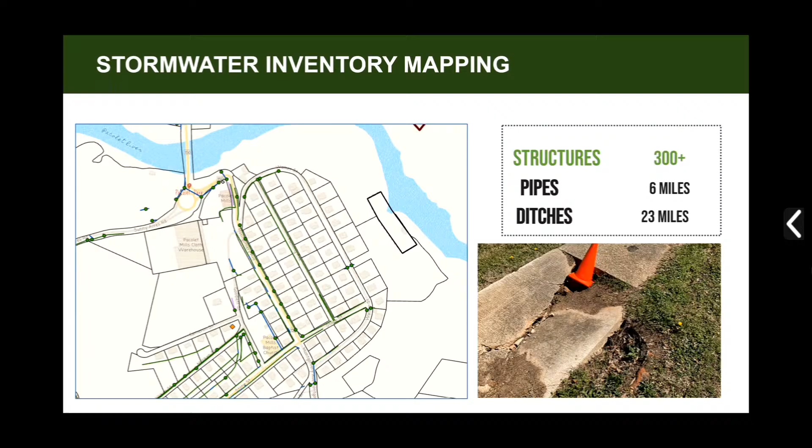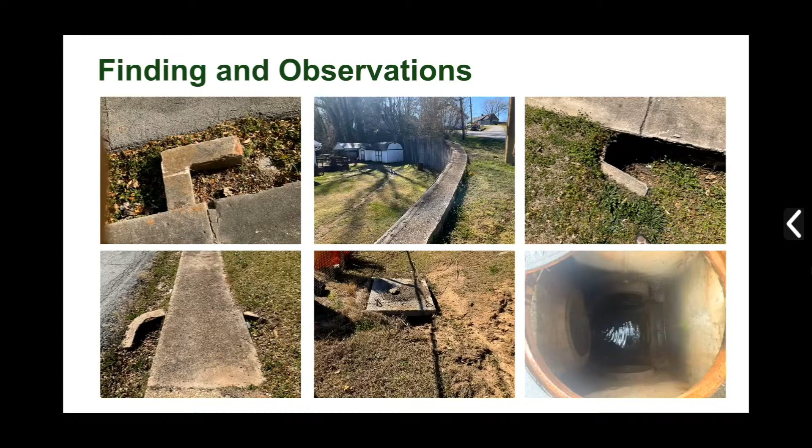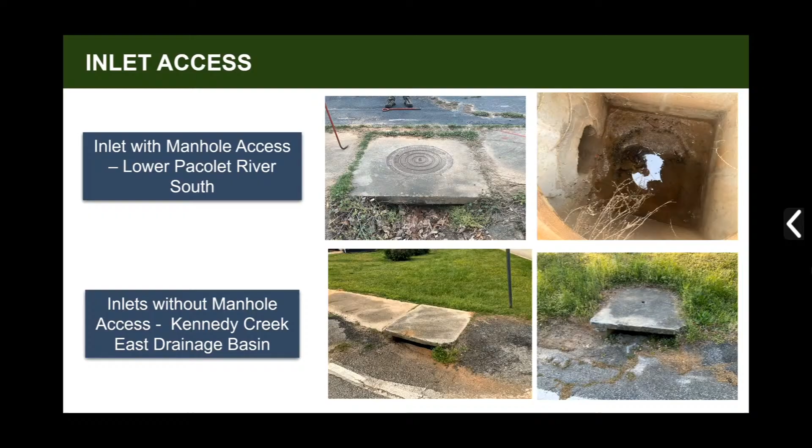Being able to access these structures to check their condition is extremely important, and as important, it allows you to clean them out, because it's very common in stormwater systems anywhere you go that sediment gets in there, debris, and it interferes with the flow. And sometimes areas that are having flooding, that's all it is. The pipes are fine. And plus the condition of pipes: sometimes you have collapsed pipes, so just keep that in mind for any future installations the city implements.

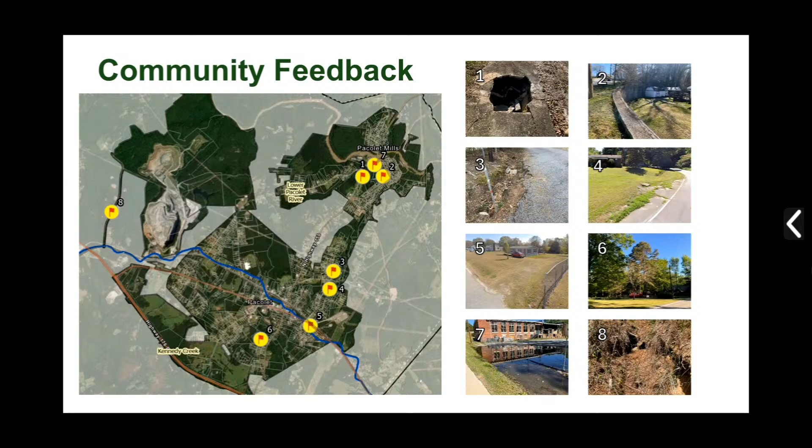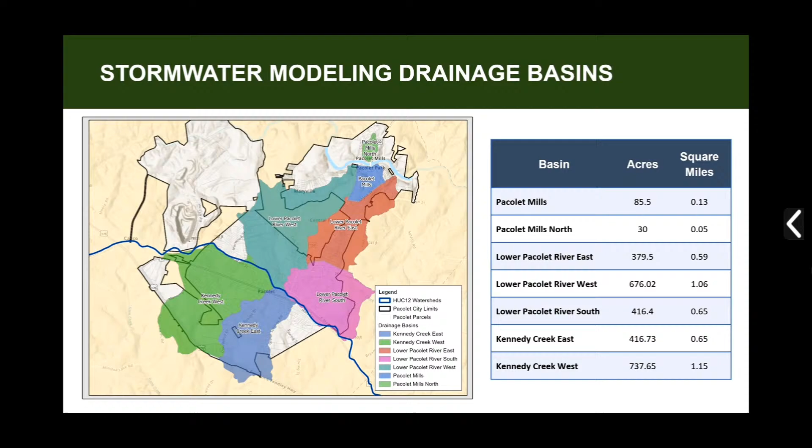The 5 watersheds that are on the north side, that blue line is somewhere right around Main Street. Those 5 watersheds all drain to the Pacolet River. The 2 to the south drain to the south. So just to keep everything oriented, that's how the drainage patterns work in the area.

Okay, so getting into the actual H&H modeling, what we use for watershed scale models is a model called StormWise. It used to be called ICPR. StormWise uses a system of nodes and links. Nodes are point features typically placed where you have an inlet or a junction box, and the model calculates water surface elevations at each of those points.

The nodes are connected by links, and there are 2 forms of links. Some links represent pipe links, so the nodes, which are inlets or structures, are connected by pipes, or they can be connected by channel links, which are open channels or ditches.

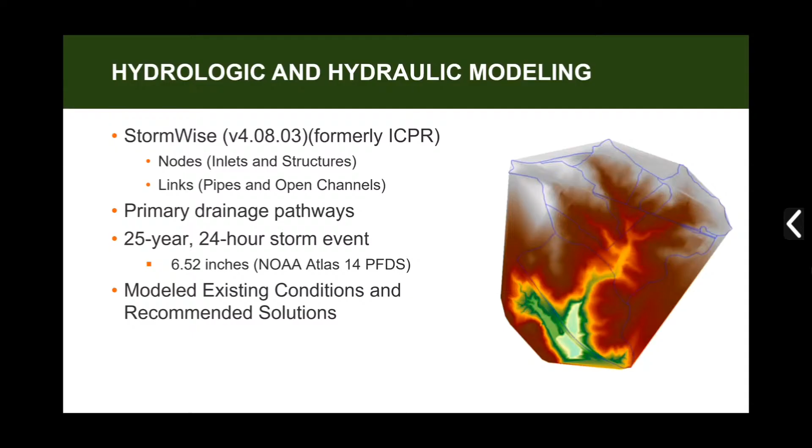We mainly modeled the primary drainage pathways throughout these watersheds, and we modeled them based on calculated flows for the 25-year, 24-hour storm event, which according to NOAA Atlas 14 here in Pacolet is 6.52 inches for a 24-hour, 25-year storm event. And for each of the basins, we modeled existing conditions, and then we incorporated our recommended improvements and modeled those also.

An example would be at a culvert on the upstream side. We would place it about at the road surface elevation, and so if the model water surface elevation exceeded that, then we would know that that's a problem because it would overtop the road. And then also for each basin, based on the model water surface elevations, we created a kind of a preliminary list of recommended improvements that would solve most of those problems.

So this slide, I think the next one goes into the Pacolet Mills, because that was kind of a very complicated thing to model. We went to the park on the west side of Pacolet Mills and took measurements for that open channel. And what we learned inventorying throughout the Pacolet Mills area is that those trapezoidal channels are pretty consistent in the same size. You can't see it, but that sketch on the right kind of details the approximate sizes.

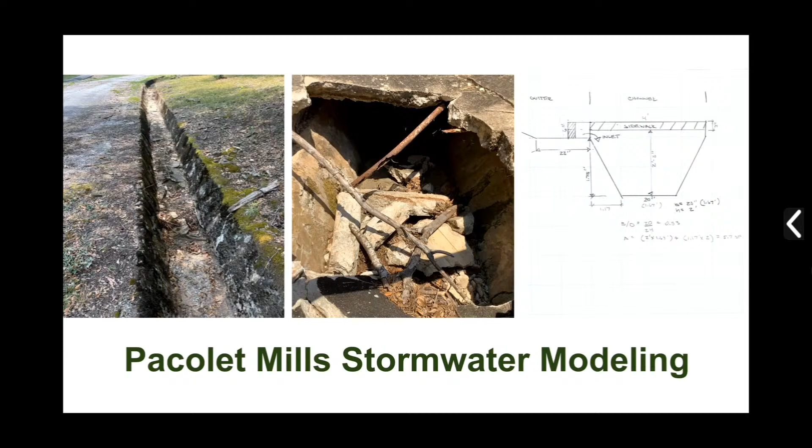The picture in the middle is also in the park, and it's hard to see, but the sidewalk covers the trapezoidal channel, which is most of the cases throughout Pacolet Mills; you can see the trapezoidal channel underneath the sidewalk. So these are a couple more pictures of Pacolet Mills. I believe this is across the river, and this we just wanted to show kind of another typical case in a situation where the trapezoidal channel is underneath the sidewalk.

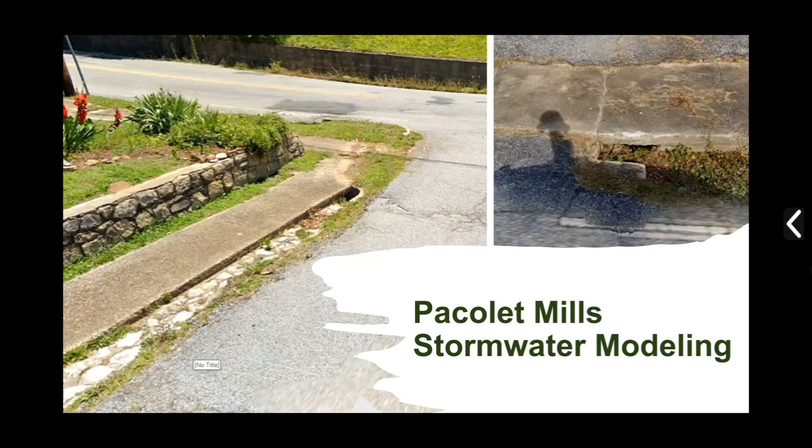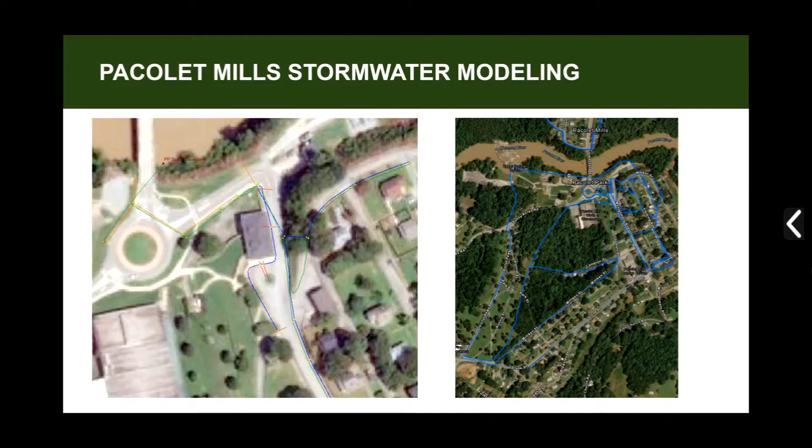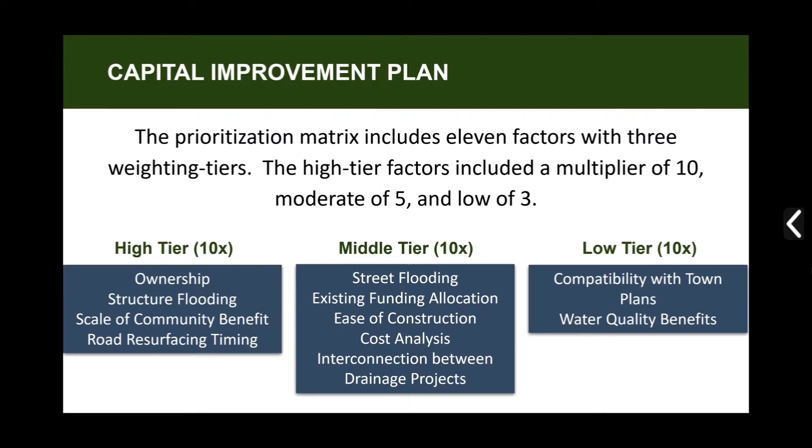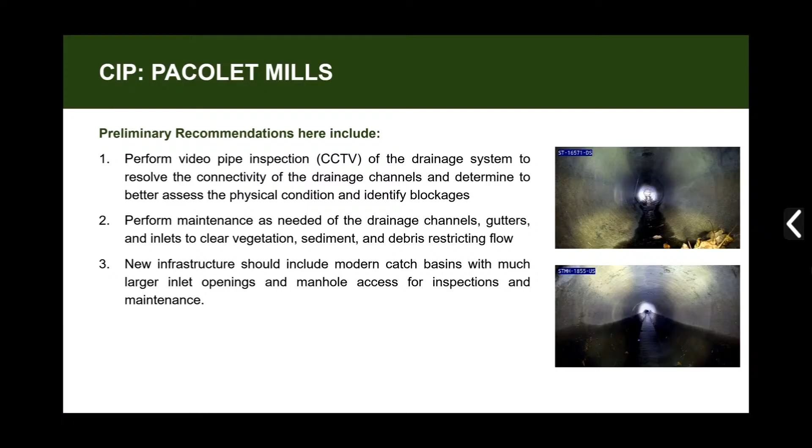So this slide, we work with a company called Augusta Industrial, and they gave us some prices. They do a lot of this work for us. So we just gave y'all some prices so you could see what you might be incurring. To do the CCTV, which they just put a camera on wheels and run it down the pipes or the channels, the price was $2.25 per linear foot for over 1,000 feet, and if it's less than 1,000 feet, a much higher rate of $8.45.

And then cleaning out the structures or any debris they found, they gave us a per hour fee of $285 per hour, which is just kind of the light cleaning, 3 passes.

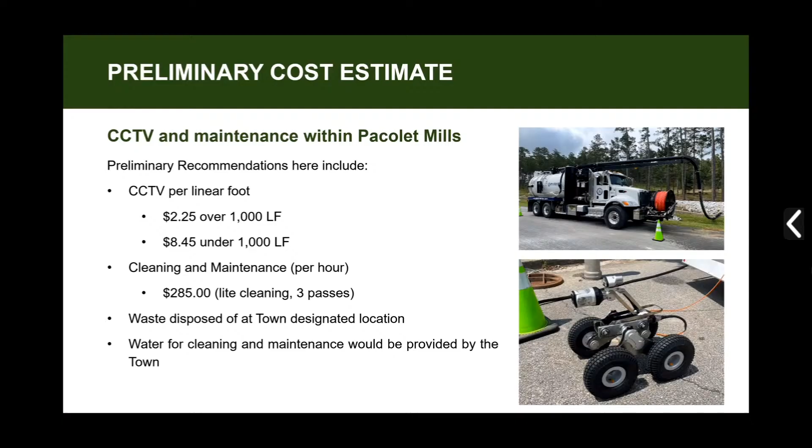They also mentioned the waste disposal would be done at a location designated by the town, and then they would need water for the maintenance, and that would be provided by the town.

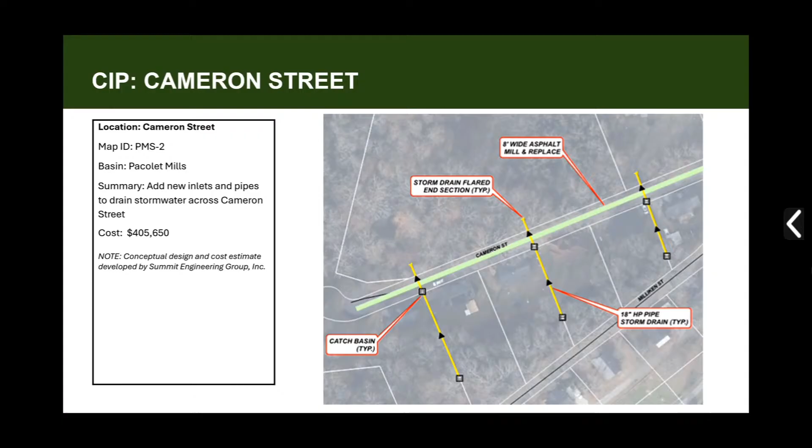This was a situation where the sidewalk has collapsed, is below grade, and it's completely filled with sediment. And when Summit looked at it, it was basically abandoning the existing trapezoid system and then putting in something brand new in this particular area. This area, if you've talked to some of the residents, their backyards get flooded regularly. Their crawl spaces or basements get flooded regularly. And this was an opportunity to try to fix some of the issues that are down there. And I think there's a swale behind those homes that runs to the west.

This is also Woodland Circle, but it's a little bit to the south in the southeast corner. And here there's a culvert underneath Woodland Circle. And as you can see on the downstream end, it's completely collapsed because of severe erosion happening around it. So obviously the culvert needs to be replaced. One of the problems is that culvert crosses the road 90 degrees from the drainage ditch that's feeding it, which is a problem because the water doesn't get into the culvert efficiently.

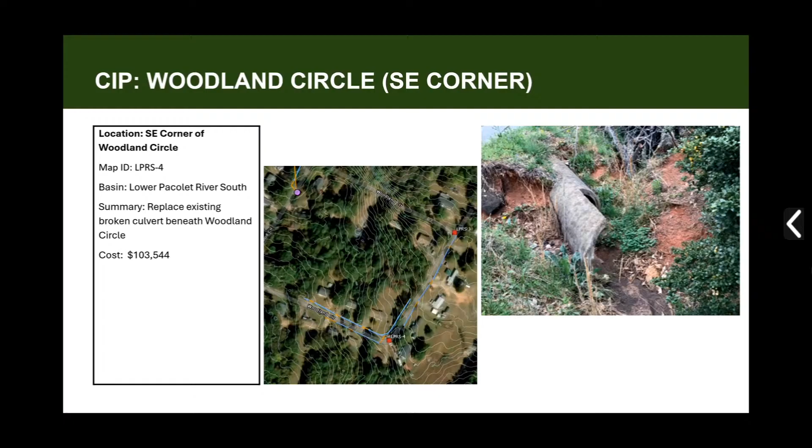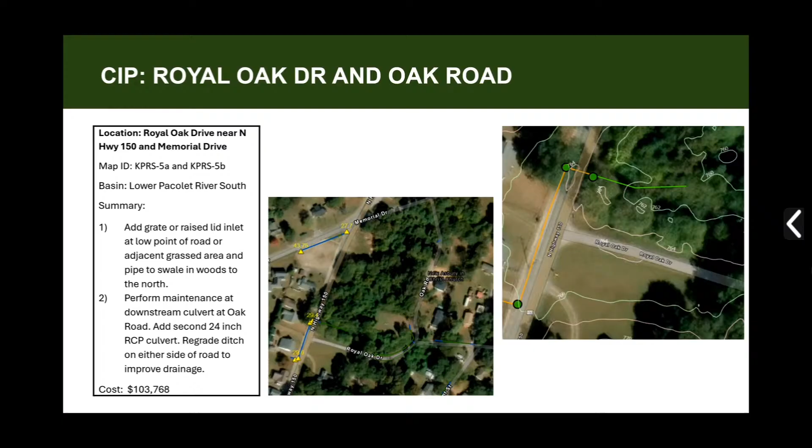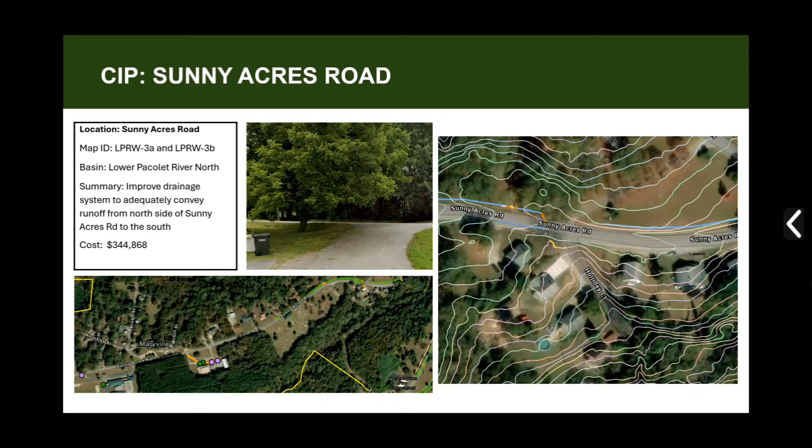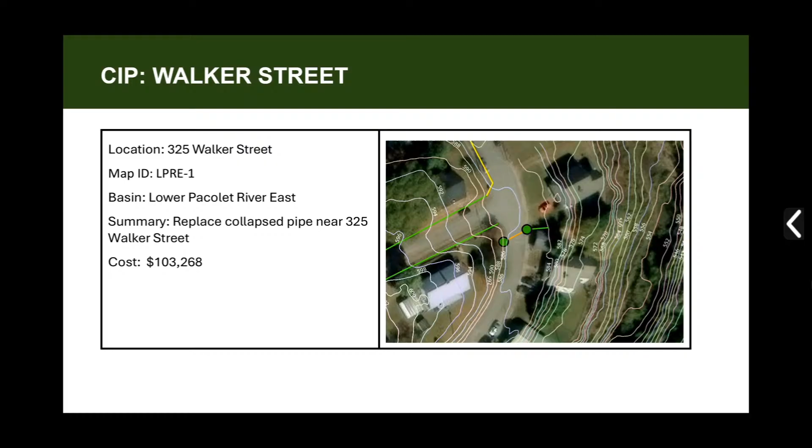So this is on Walker Street. I believe it's also in the Pacolet Mills area, kind of on the southern edge. And this is where there's, I believe, a collapsed culvert. So this is kind of a simple improvement: there's 2 existing grate inlets there, and we propose just replacing both the grate inlets and the pipe and piping it off downhill between those homes.